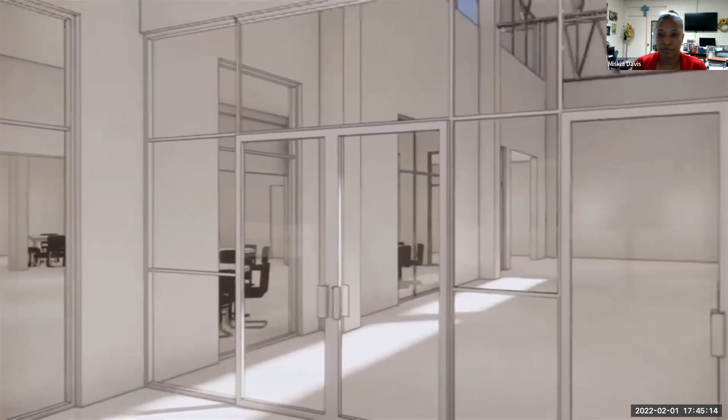As you enter the building through the new entry, you'll be entering a secure vestibule that is not only a major lobby of the building, but also creates a secure space for visitors to be processed into the building. To your left is the new cafeteria addition, and to the right is the new administrative area, which serves as secure entry.

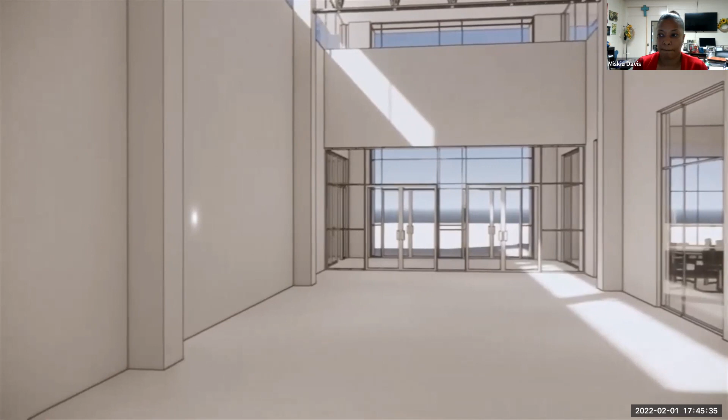This is the public lobby that will also serve as an entry to the gymnasium. As you can see back into the cafeteria, there are separate doors into the gymnasium and a new concessions area right off of the lobby. This is looking back into the lobby that eventually leads you down to the new academic area.

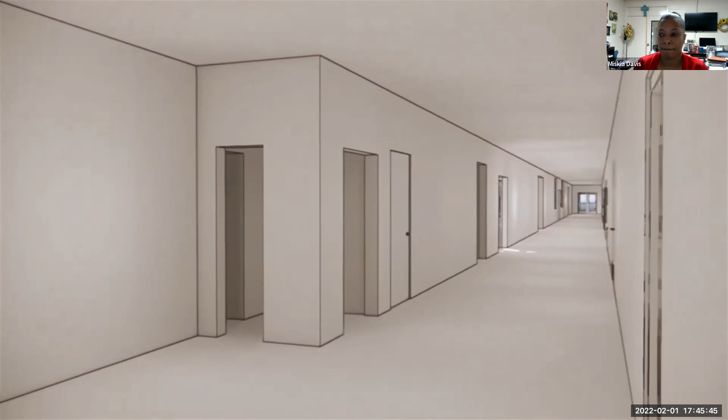As you enter through the new academic wing, it will be replacing the entire front of the existing building. There will be several new academic spaces creating classrooms that are state-of-the-art, interdisciplinary academic spaces for math, science, language, arts, and social studies. This is a view back into the existing building, and to your right will be the new academic spaces that also interface with each other with sliding glass doors, allowing interdisciplinary learning.

Looking back down other existing wings that tie into the new academic spaces, creating one secure building. As you continue down through the corridor, you'll get glimpses of these new academic spaces with glass walls onto the main corridor and flexible furniture.

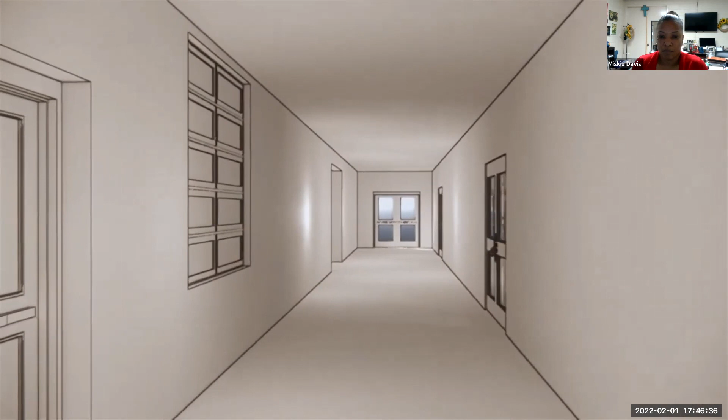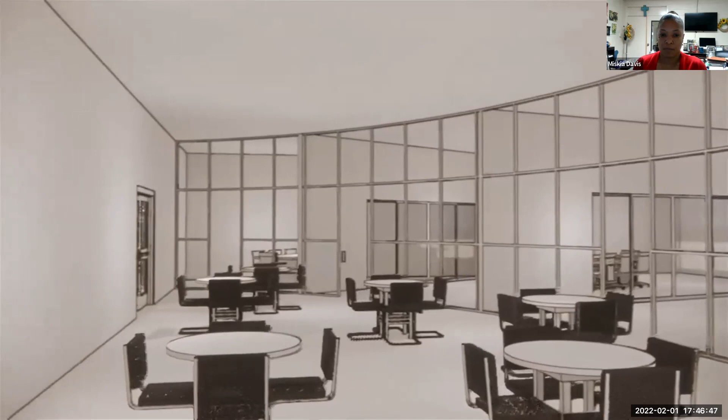Continuing down at the end of the new wing will be the new media center that not only serves as a state-of-the-art media center, but also spaces for interventionists to do single and multiple student interventions, with glass walls opening into each other, allowing flexibility and interactive student-to-teacher ratios, as well as access to the media center.

This creates the main academic spaces of the building, leading back into the corridor that ties into the rest of the building. All of the remaining spaces will undergo full renovation so that all existing spaces will be similar to the new construction with tile, ceilings, finishes, doors, etc.

Okay, so that was a virtual rendition of Thomas Edwards, and now we will see what Gentry High School is proposed to look like.

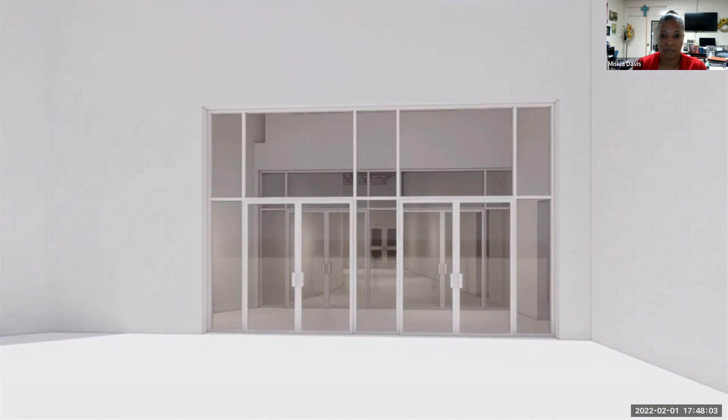As you enter the new lobby, you will see the new academic spaces to the left and the high space. You'll be entering through a new canopy to a secure vestibule, which serves as the main visitor entry for the building and the public lobby for the school.

To the left will be the academic spaces, and to the right will be a new administrative area, which serves as a secure entry to the building.

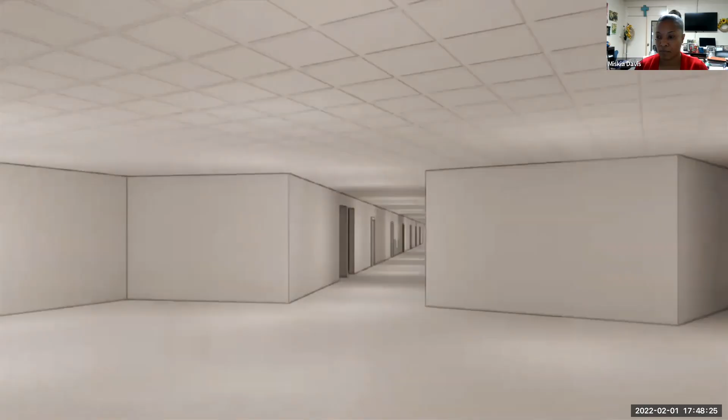Entering through the lobby, you'll get glimpses back to the new interdisciplinary academic zones that lead you into a sub-lobby that is the control point for all academic spaces. From this point, the principal can see down all of the academic wings of the building, with new classrooms oriented off of this major controlled space.

As you enter down a new hallway past administration, you'll see new science labs that are interdisciplinary labs overlooking a new courtyard. This corridor continues to a secondary entry near the existing cafeteria, which is being expanded with a major addition shown here in the rendering.

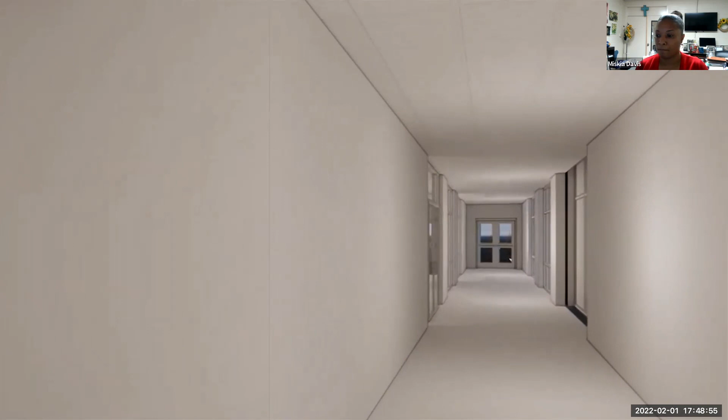As you can see through the glass walls from the new space into the existing space, creating a better environment for dining for all students.

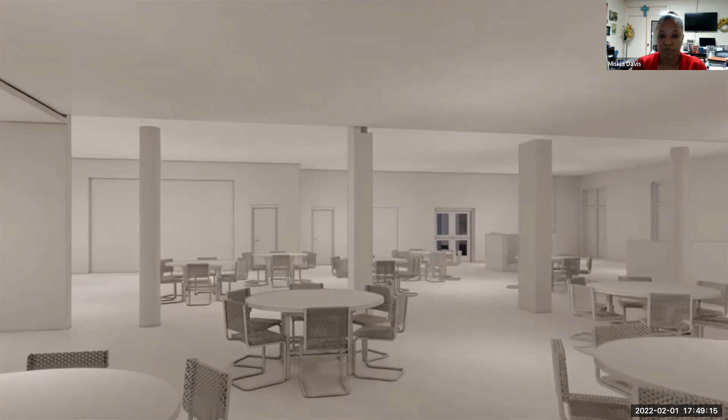The cafeteria opens back onto a new hallway that connects the new academic areas into the existing building. As you can see, there will be new furniture throughout the building, including the dining space.

This is the corridor that leads from the new spaces into the courtyard here, which is an interior courtyard contained for security, but can be used for student access, leading back down toward the existing wings of the building.

To the right is the existing cafeteria and kitchen, and at the end of this hallway is a connection to the gymnasium, which will have new entry elements that provide secure access into the gymnasium with full renovations of the gymnasium.

These connections to all existing academic spaces will have renovations of the existing classrooms to match the quality of the new classrooms.

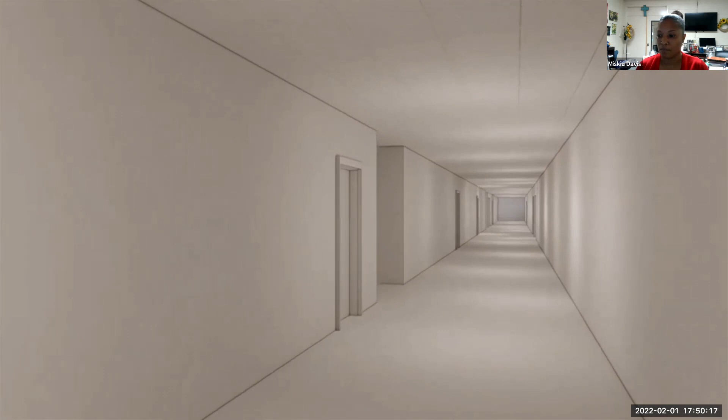This new corridor along the east side of the new construction connects the new building to the existing buildings, so that most of the academic spaces, both new and existing, are within interior spaces, keeping kids in a safe and dry environment. To the left are the new academic wings of the building, and to the right are the existing academic wings.

At the end of this hallway is a new band hall that is renovated from existing space, creating a dramatically larger band hall and expanded choral music areas.

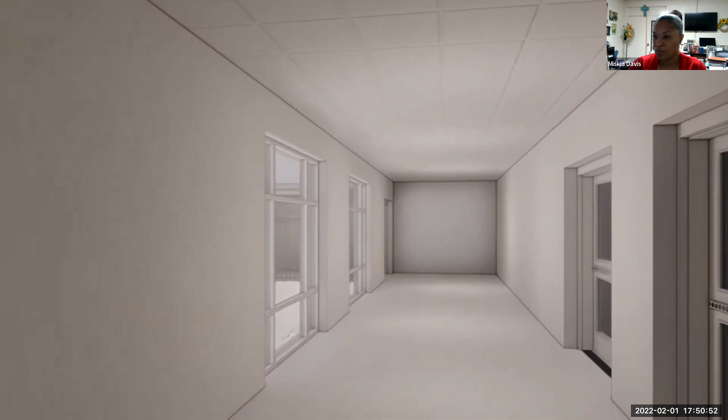At the end of this hallway connects to a new student courtyard area that is contained within secure fencing at the north end of the campus, still connecting all of the wings of the building in a safe environment. This could be used for outdoor classrooms, outdoor activity spaces, and still be within a safe zone for control of all student access. Beyond is the new academic zone and new classrooms on your left.

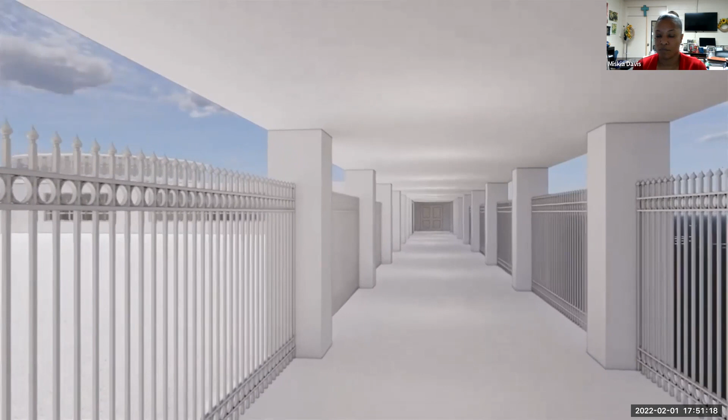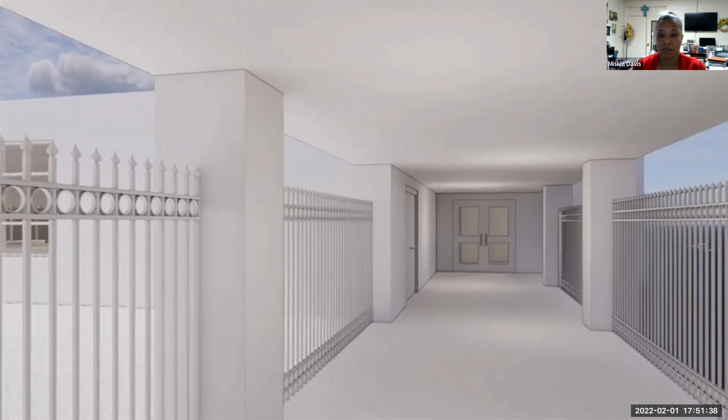This canopy connects back to the existing media center, which is being dramatically renovated to include new media space, which you will see in a minute. That also includes intervention classrooms that have glass walls connecting all of the existing spaces into new intervention spaces.

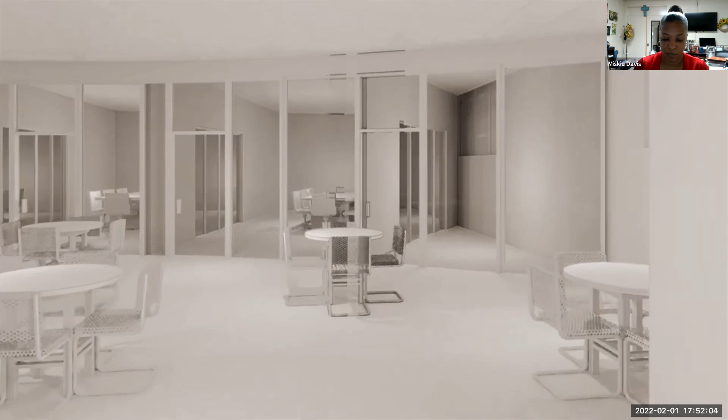As you enter these doors, you will enter a new corridor off of the existing media center. This corridor ties back to the front entry to the building. On the left are additional new science labs along this new corridor that ties into the main sub-corridor. To the right is the new media center and intervention spaces, with glass walls that provide access for each space to the others, opening them up into larger academic zones.

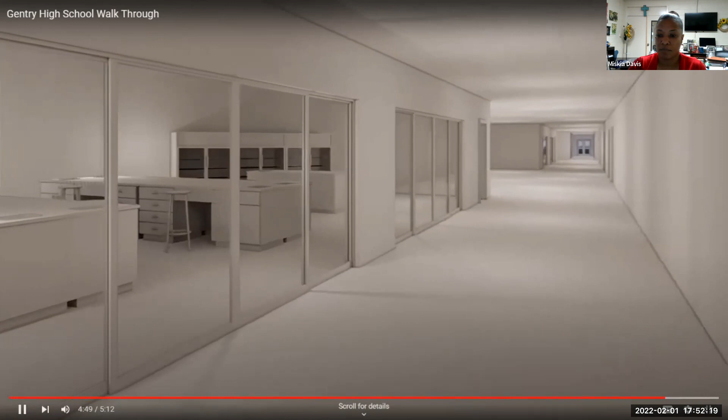Continuing down the hallway, you will lead back to the center control point, again, where principals can stand and see all of the major academic spaces and the new entry to the building. This high school will be a state-of-the-art facility. It matches the quality and content of Thomas Edwards, a first-class learning environment.

Okay, so you have seen the virtual renderings of both Thomas Edwards and Gentry High School.

I had two questions in the chat that I responded to, but I will answer them here. The first question was, why isn't there an oversight committee? I asked if he would expound on that, and he said a collective body that ensures there are no shortcuts. My response is the board has hired a project manager to oversee this entire project.

Our maintenance department is also a viable component of this process, and they are working with the architect to make sure there are no shortcuts. We've had projects in our district before where people tried to take shortcuts, so we wanted our maintenance department working hand in hand with the architect and the people on our campuses to make sure we do not have any shortcuts at the completion of this project. As I shared, the board has hired a project manager whose expertise is overseeing large projects, which will help us make sure our contractors are held accountable.